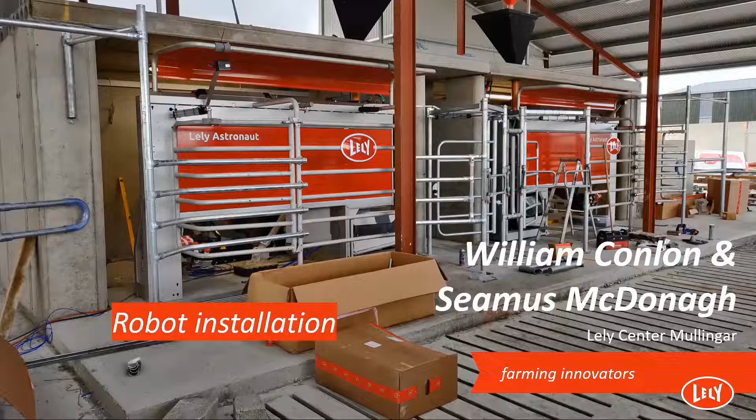Okay, thanks, Niall. So my name is William Conlon and I work on the yard design side of things. I'm just going to take you through briefly the design side of the build and what the project coordinator's role is when it comes to installing a Lely robot.

So my first visit on the farmyard design side of things, I'm really trying to get a feel for the farm, the farmer, how machinery moves around the yard, how cows currently move around the yard if you're an existing farmer, or how cows could potentially move around your yard if you're a new entrant into dairy. So you're looking at what sheds are on the yard, what sheds you could tie in and convert over and use for cubicles and to put the robot into, or alternatively, if there's no shed suitable, then where you would position a new greenfield build.

So what you're really trying to achieve is maximizing cow flow throughout the yard to get to and from the robots. You're depending on your cow to walk in from grass, be milked, go through the robot, go back out through the Grazeway gates and go back out to grass. And you're asking her to do this a couple of times a day.

So the last thing you want to do is put any sort of blockage in her way that's going to slow her down or stop her getting to that robot. So it's all about trying to maximize cow flow and just give cows the options of going into the robot at ease.

Like I said, we're looking at the area that's for development, whether it is existing sheds. I suppose a lot of the jobs, maybe 80% or more of the jobs we're involved with, you're trying to fit a robotic milking machine into an existing shed without compromising on the space around the robot, on separation areas, or any of the other aspects involved with robotic milking. So it is a balance to try and get everything into existing sheds.

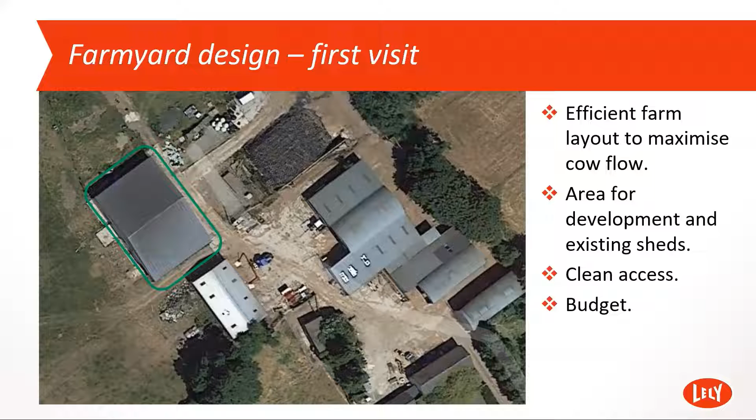A year later, the farmer installed the second robot and pushed on the numbers. To start off, 2 banks of head-to-head cubicles were run down through the shed. To one side of the shed then we had our Grazeway.

So this is, I suppose, what we'd call the dirtier side of the yard. This is the side where cows are going to be coming in and out the whole time. So there's going to be a lot of cow traffic, a lot of movement over this area. So this is what we call our dirty side.

So then we look at the other side of the yard, what we call the clean side. This is the side where your milk lorry is going to be coming in, where our service engineers are going to be coming into your robots, where you're going to be driving in and out with machinery, either with silage, where your meal lorry is going to be coming in. So this is the side there's going to be a lot of traffic.

So we want to keep cows away from this, because I suppose it's different to if you were milking traditionally through a parlour. You can bring your cows in, lock them in, milk them, and work around the yard and then put them all out. Whereas with the robotic system, there's cows coming in and out entirely.

So here we see our milk, where our milk tank is located. Our lorry comes in, picks up our milk, swings around and goes back out. We also have our milk coming across the yard underground in a duct over to our tank.

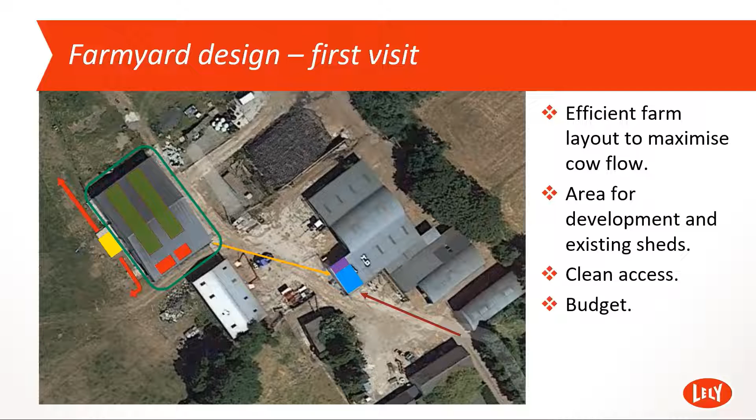So then outside of my role as kind of the farmyard design, we also look at what the lads do as kind of the project coordinators and what the benefit of them is to the project. So I bring the project up to a stage where we've agreed the design. We're fully agreed in the design.

That could take 3 or 4 visits depending on the farmer and what they want to do. You might present a couple of different options to the farmer and see what they come back with. So when the full design is fully agreed upon, we hand over to a project coordinator.

The big benefit of having the 2 project coordinators is that they've installed 350 robots plus between them. So there's a great wealth of knowledge and experience of what's involved with an installation, how to liaise and how to work with builders to make sure everything is being done correctly, so that when we come to install the robot, there are no hiccups or delays.

So like I said, it leads to a reduced installation time when it comes to actually fitting the robot itself, because everything is done right. The robot can be put in, bolted down, and away you go.

They give good guidance to keep the building costs of the project down. Just because they have that much experience of the building work and what's involved, they can guide farmers as to what they should do and what they shouldn't do, and help keep a lid on costs.

They produce detailed builder specification drawings that the builder is able to work off, so again, there's no confusion about where ducts need to be or what needs to be done.

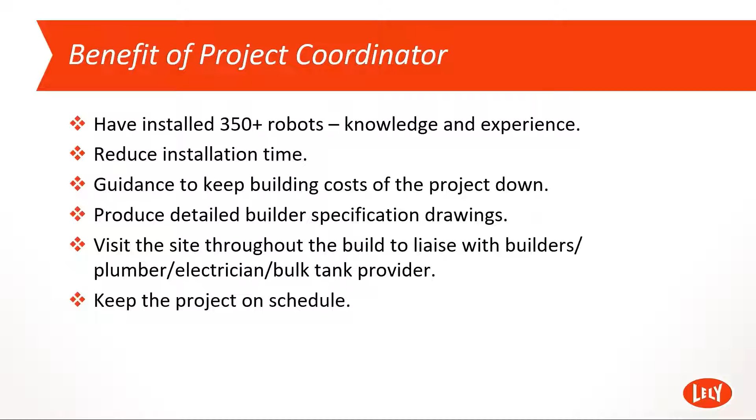Along with this, they'll visit the site throughout the build and liaise with the builders, the plumbers, the electricians, the bulk tank provider, just to make sure every aspect of the project is moving along at the same stage. Because often when there's building work going on farms, it can be difficult for farmers to focus on all the areas and keep everything moving at the same time.

So their job is really to keep the project on schedule and stick to the agreed upon installation date, whenever that may be set out, maybe 4 or 5, 6 months before the robot's installed. So then they deliver the project right up to the robot startup.

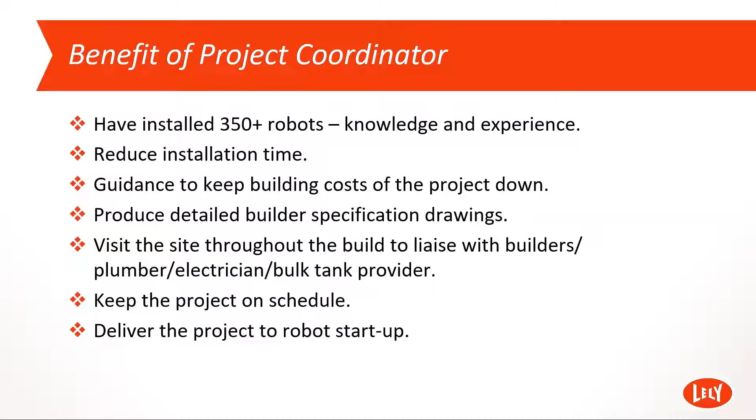That's where their job ends, and I suppose we hand over then really to the farm management support advisors who work with the farmers from when you start milking moving forward to get the best out of your robot. If we're looking at installation times, I suppose we have a big benefit compared maybe to traditional milking systems, parlours, rotaries, whatever system it'd be.

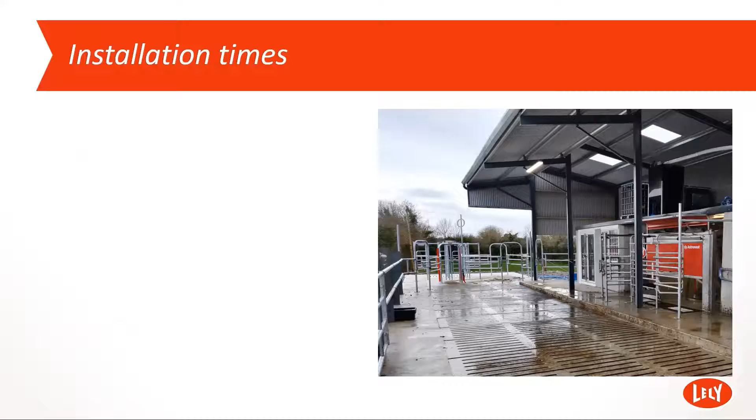In that we could typically install a single robot and Grazeway in 3 days. We'd run all the services, the milk line, the air line, the communication, the chemical line, and the water lines are all run when the first robot is put in. So it means that if we come back to add on a second robot, or third robot, or fourth robot, you're just teeing off these lines that are already run, so it's a lot quicker of a process.

We could do installation jobs for 280, 300 cows in maybe a week and a half, which is a big difference to what some of the larger jobs on traditional systems could be.

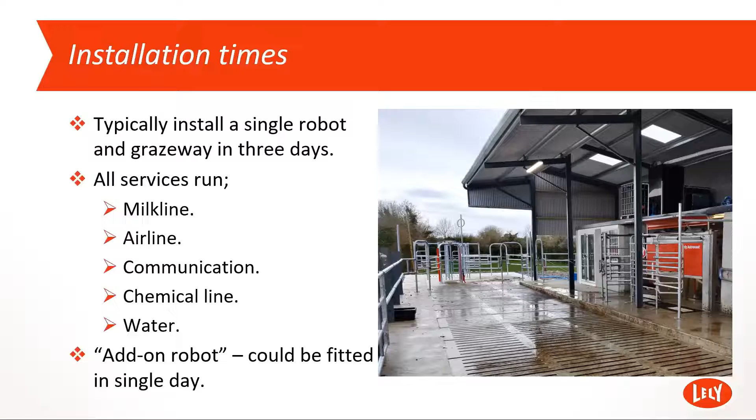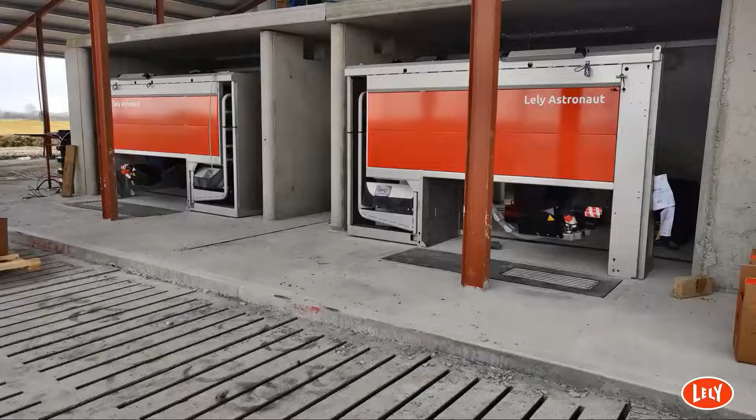So then this is when the robots can be simply lifted into place. And the work here then develops from this onto this image, which is the robot with the bar work completed around it. So that's what we do, that's what our engineers do, and you leave robots like that ready for startup. So there's no additional bar work that needs to be done in that area.

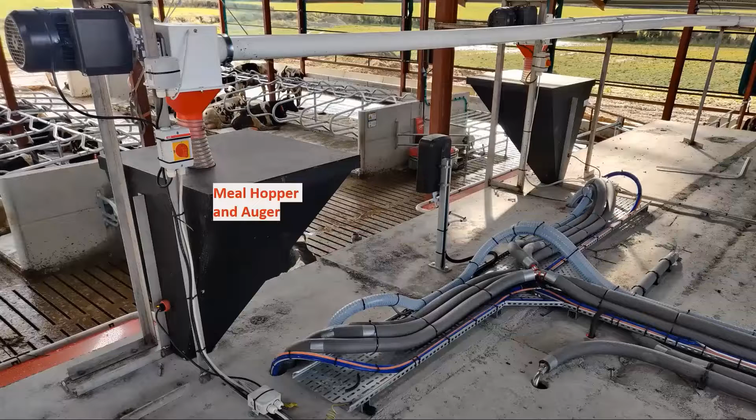Again, we're just going to look briefly at what's above the robot. Very simple. You have the meal hopper and the auger. You have your milk line dropping down into the two robot rooms. You have your vacuum line, again, running to the two robots, and your airline communication and chemical lines. You also have your water. So this is all what we do.

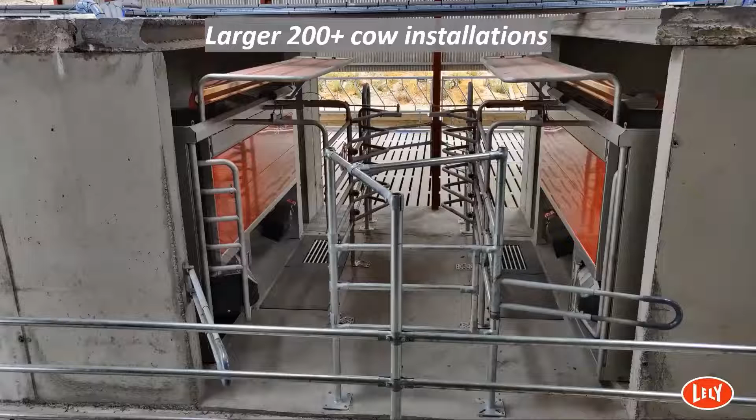This is what the team at Lely Mullingar provide when we do an installation. Now the meal hopper and the auger, that's up to the farmer to sort out, but all the other lines is what we do. So I suppose we've looked at the last job there, a two robot head-to-head system.

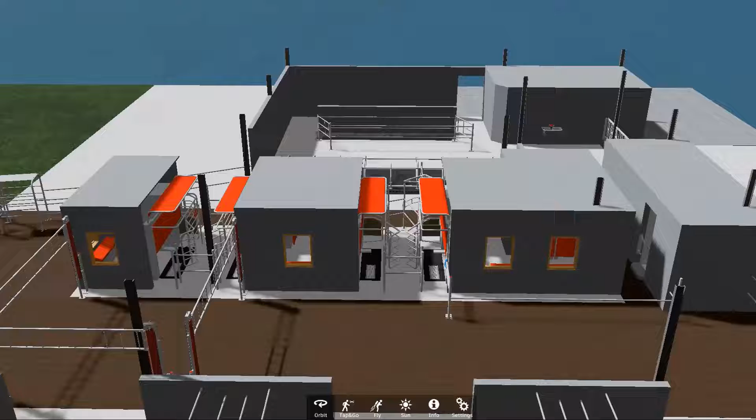For larger jobs, maybe 200 cows plus, we can see farmers going with a checkout system. This is where the robots are put up in a line beside each other. There's positives and negatives to each system, which you can maybe see on earlier webinars. We see here that the cows enter from one side of the robot, the near side, and exit out onto a different area, the far side. So it just keeps the pre-milking and post-milking cows separate, and can be a real benefit for cow flow when you have those 200 to 300, 400 cow herds going through robots.

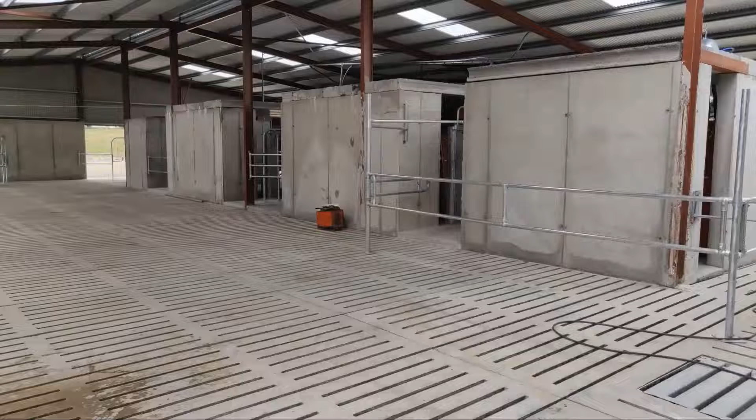You can see as well that the four robots in this picture still take up a relatively small footprint. A few spans of a shed, and this is a shed that can milk 280 cows through four robots. On the right hand side we have our two central units, these act as the brains of the robot. This is where the chemical is pulled from, and where the water is heated for the robots as well.

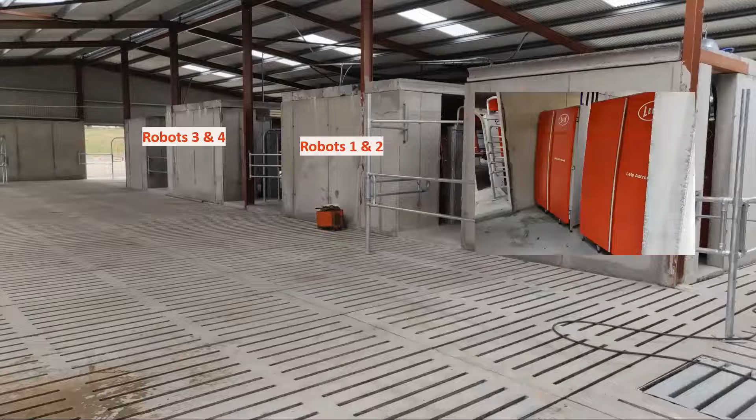The next room then, we have robot 1 and 2 inside that room, and robot 3 and potential robot 4 in the far rooms. Again, this is your two central units, two cabinets. We have an area behind these where you can drop in big barrels of chemical, trying to keep the labor side of things down. It's all trying to feed in to make the system run as simply and efficiently as possible for both the farmer and the cows.

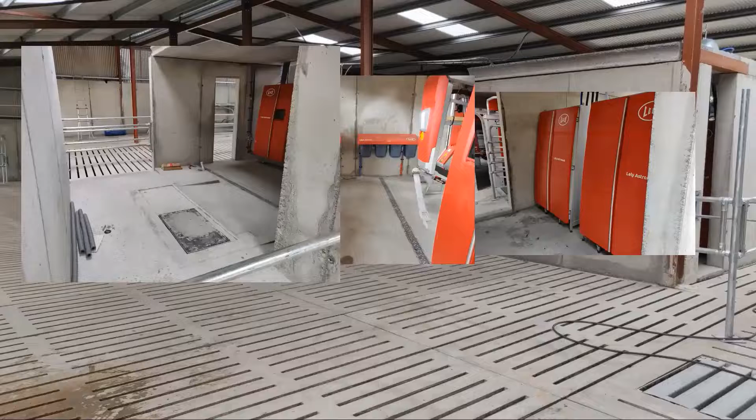This is the inside of the first and second robots. We have our milk-for-use buckets on the back wall, where you can send either colostrum milk or waste milk. We have the inside of our third robot on the right hand side in that picture, and we have the base already in place for a potential fourth robot down the line. You're looking at an installation of that fourth robot of maybe a day and a half, so it can be a very, very quick and efficient system.

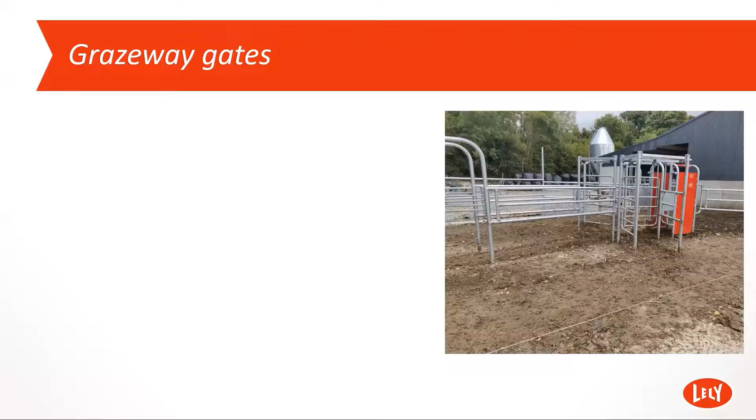Outside the robot, I suppose the other key area is the Grazeway gates. These are the drafting gates that work in conjunction with the robot. We'd work a lot with the farm management support advisors as to where this should be located on the farm and the layout of it. They generally walk the farm and map the grazing block itself and decide where the roadways are going to be and how cows are coming back into the yard and exiting the yard.

They work from the Grazeway out towards the land, and we generally work from the Grazeway back in towards the yard. So there's a lot of work over and back between the two teams to make sure cow flow isn't compromised when you're deciding the location of the Grazeway gates.

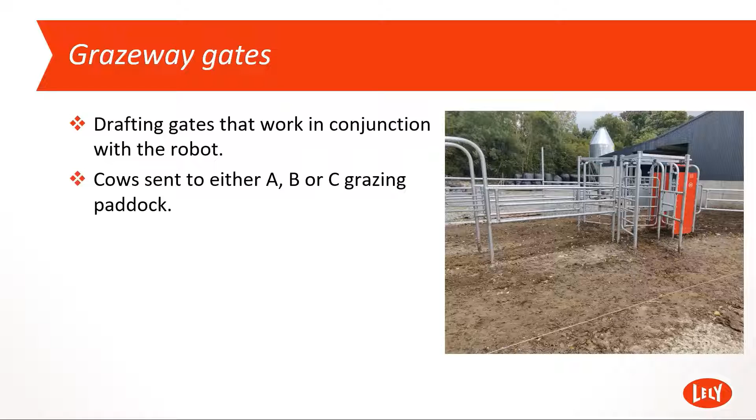Cows can be sent to the A, B, or C grazing paddocks from the Grazeway gates. To get out of the yard they have to go through this Grazeway gate, the red gate you can see there in the picture. If the cow is due to be milked, she won't be let out through this gate, she'll be kept in the yard. But for cows to get back into the yard, they don't have to go through these gates - every cow has free access to go back in through the one-way Texas gates to get back into the yard to be milked.

You also have the option to send cows to a local paddock from either the Grazeway or from the robot. This can be a small, maybe half an acre paddock close to the yard, where you could send cows that are in heat, or a sick cow if you want to have a look at her and don't want her standing on concrete. You'd see the real benefit maybe in May time - if your bulling cows are automatically drafted off because of the automatic heat detection system, they can just be waiting in this paddock for when the AI man comes, brings them into the shed and AIs them. They can get from this area back into the robot to be milked, but they'll only be let back out here again.

Generally, your Grazeway gates are located on either a concrete slab or a slatted tank or maybe a flow channel. Lately, in the last couple of years, we've seen a lot more farmers putting in a slatted tank anyway because they're under pressure for slurry storage, and they're running it out a bit further than the shed and having the Grazeway gates on it. But there's still probably half of the Grazeway gates on farms sitting on a concrete slab.

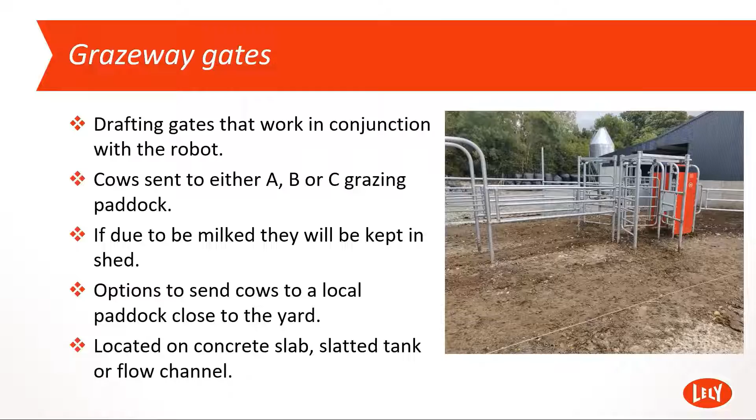Here we have a relatively recent installation of a Grazeway on a slatted area. You can see the bit of a track there where cows are coming in and going out through the gate the whole time, so it can be an area that gets dirty. The tank underneath just makes it an easier area to keep clean. Again, another Grazeway just sitting on top of a tank.

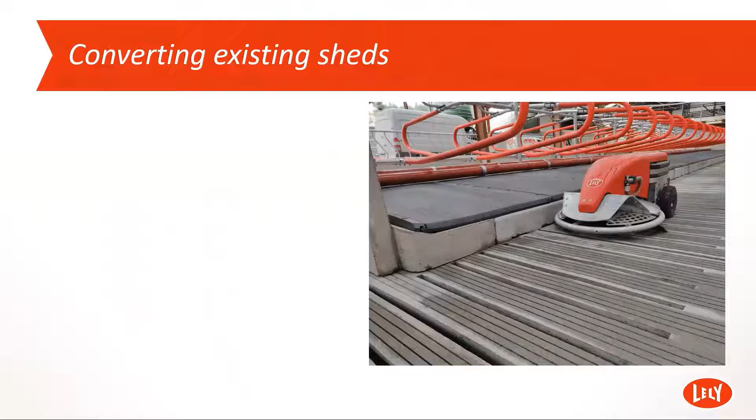For suckler or beef men that are swapping over, a lot of farmers use existing sheds to convert over to cubicles and put the robot into. So, by and large, we want our robot sitting just off a slatted tank, as it is a high traffic area.

This is easy to incorporate if we have a new build. But where there can be difficulty is if you have an existing build and the slatted tanks really aren't suiting the location where you want to put the robots, but you still have a good lot of slatted tanks that you don't want to go building more slurry storage that you don't need.

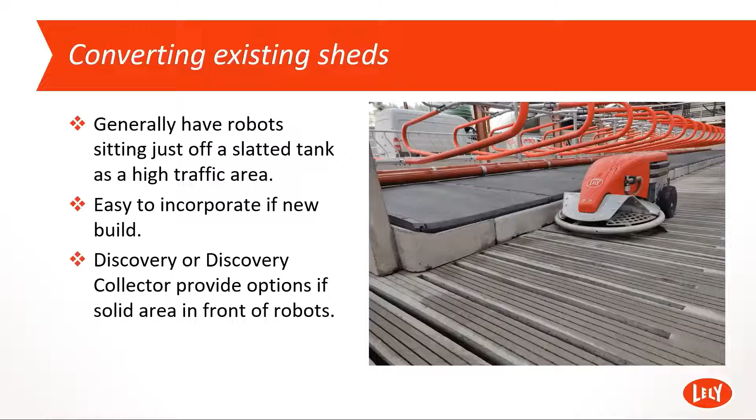So you have the option of maybe going with the likes of a robotic scraper. They can either be the standard Discovery, shown in the picture here, that'll just push slurry in front of it, pushing over a solid area into a slatted tank, or you can go with the Discovery Collector. This will suck up slurry when it's on a solid area, and when it gets to a slatted tank, it'll dump the slurry. Again, it can provide a lot of options to farmers and maybe be more cost effective than having to build a slatted tank.

Here we have a 2-robot installation with solid area in front of it and a lot of slatted tanks. He's using a Discovery Collector to keep that area clean with 120 cows being milked, so it's doing a good job.

Here we have another single robot farm, again not far from a slatted tank, but solid area in front of the robots. He went with a standard Discovery to push the slurry into the slatted tank a good few times a day to keep things clean.

Just going to talk briefly on the TAMS grants that are available, because the deadline is the 21st of August to apply for this tranche. There is another tranche opening up on the 22nd of August, but the amount of people applying for the TAMS grants is increasing. So if you're thinking of doing something, it's well worth putting in an application or giving us a call, and we'll talk through with you a bit more of what's involved.

A general applicant can get 32,000 in grant aid, and a young farmer can get about 48,000 in grant aid. And if farmers go into partnership together, they could get between 64 and 96,000 in grant aid. So it's a lot of money, and it's still well worth looking into if you're thinking of going down that route. One of the benefits of a robot is that there's no planning permission needed if you're applying for a grant on a robot.

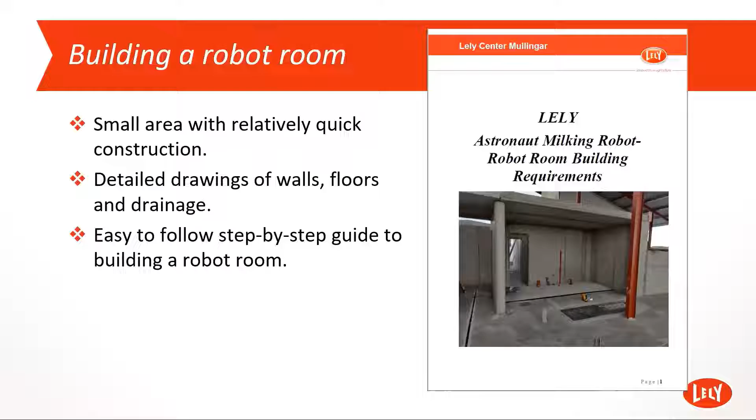What's involved in it is walls, floors and drainage. We produce a step-by-step guide to building a robot room, and we also produce drawings, probably about 5 or 6 different ones. The first drawing shows the wall layout. The second shows a cross section through walls with drainage underneath the robot. The third would show cow flow, so the builder can understand where cows are coming from, where they're milking in the robot, and where they're going to, giving him a better understanding of what we're trying to achieve. The fourth shows typically the foundations underneath the robot and the support. The fifth and sixth, again, are for the robot footing and for drainage.

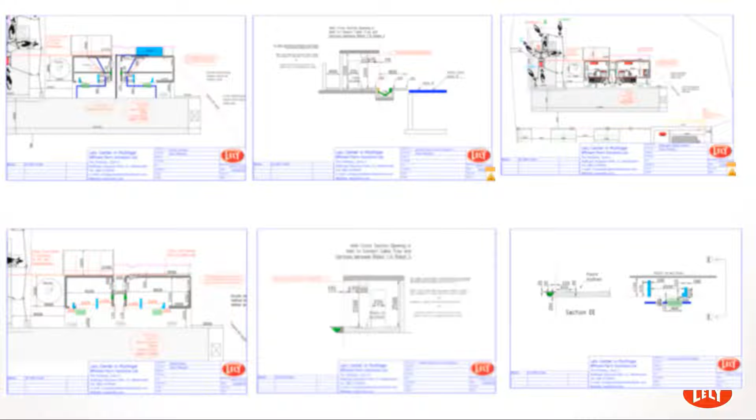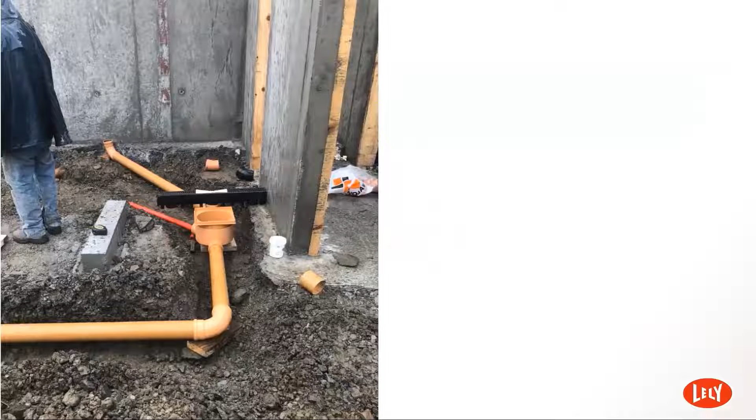The next slide shows some of the drainage underneath the concrete floor. You can see an unlidded access junction, or unlidded AJ, and this is how we get the milk across the floor. You can see it goes under the drain and over to the back wall. This is poured inside in the floor screed.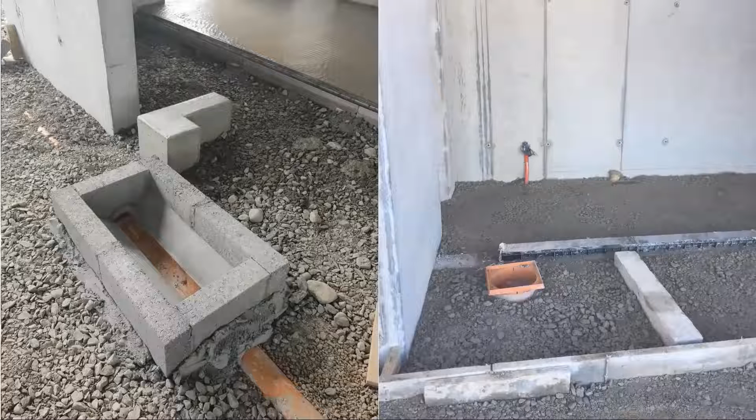The second slide just gives you it from a different angle. Here, underneath the grate, is the manhole I was talking about, where the cow will dung into, and then it's taken away in the 4-inch pipe. The other two concrete pads — one is an L shape, and the other is a slender pad, about 3 foot long and maybe 6 inches wide. This is where the robot is bolted to, and this is where the robot takes the weight.

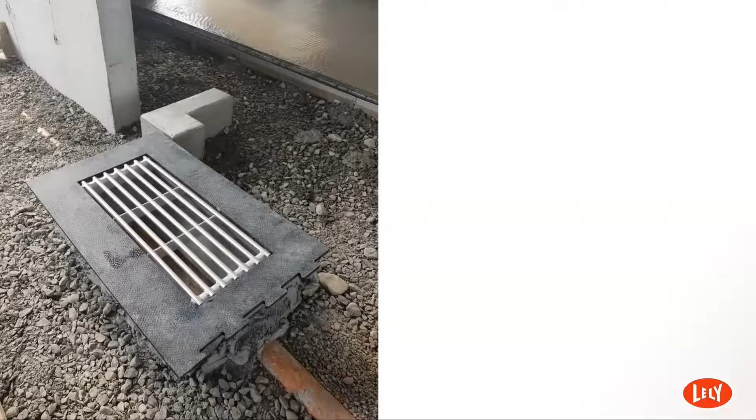Here again we can see the rubber mat and the grate, as I was explaining earlier. With a wider angle, we can see the rubber mat and the footprint that the robot is bolted to, just before our final concrete finish goes on.

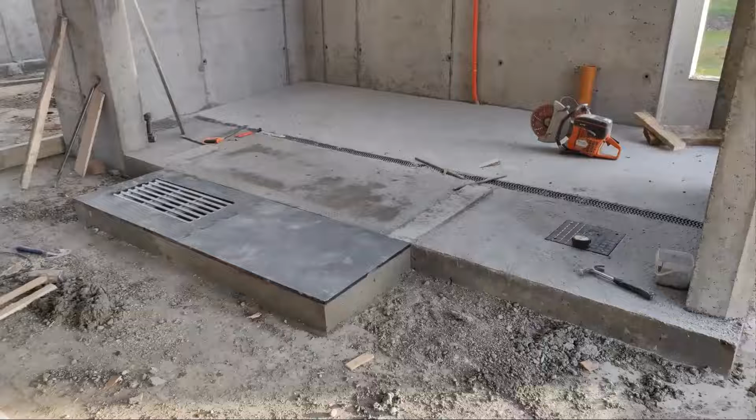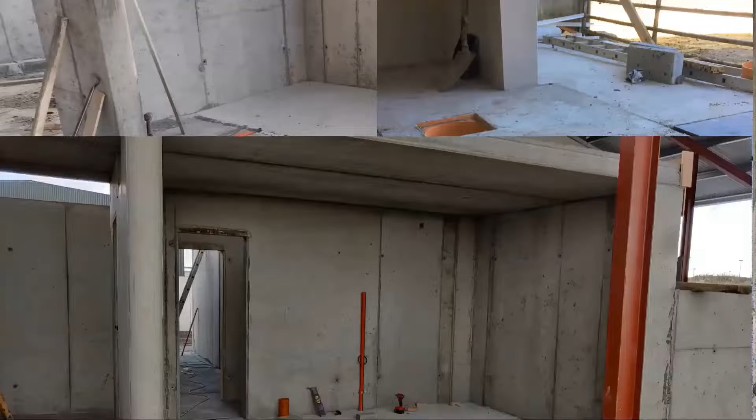Developed on, you can see the mat and the final floor put in place. That black drain I was talking about is the surface drain of the floor. You can see the floor is falling, falling to a V toward this drain. This is what keeps the whole area clean, with water disappearing down that drain and away from the area. Again, just to remind you, that's the finished room.

So what else is needed for the building area, or what do we need to produce? We need a dry, clean, dust-free room for our compressor — this is the compressor. Then we have our milk filter, so the milk passes through the milk filter, and from here it heads off to the dairy.

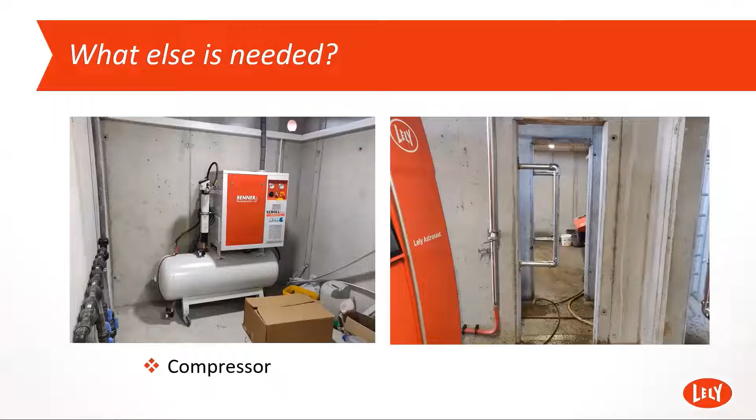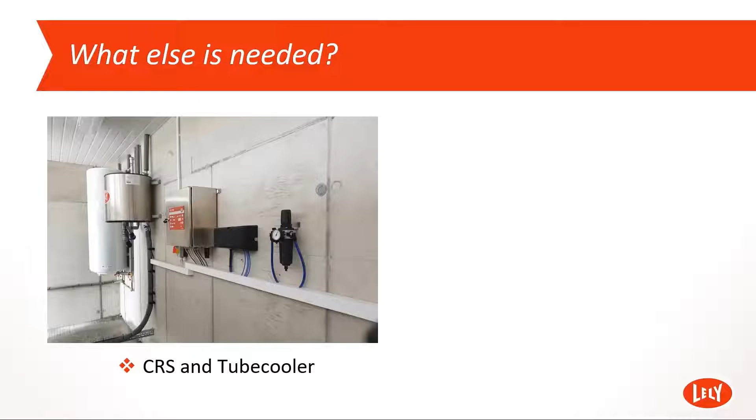When it gets to the dairy, in this photograph we can see our tube cooler, that cylinder on the wall. To the right of the tube cooler is our CRS, which is the communication between the milk tank and the robot. Also, we need an office, where we keep our computer, and there are software licenses associated with the T4C, which is the farm management software.

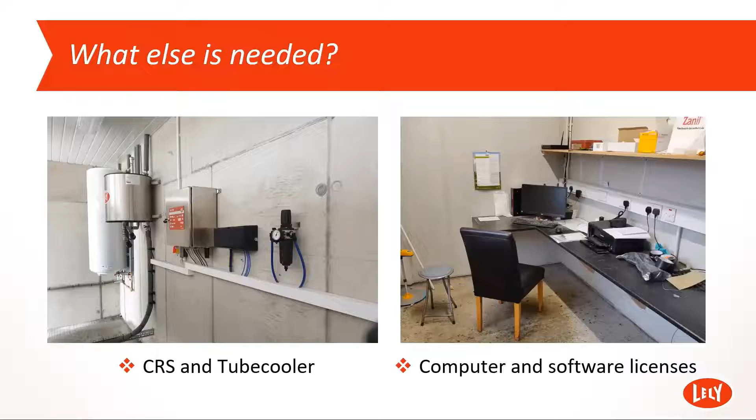Next, we talk about the minimum electrical requirements. You can either have single phase or 3-phase. The requirement for our 2 robots is 7 kilowatt. The compressors are 4 kilowatt. Typically a bulk tank would be 3.5 kilowatt and a dairy heater would be 3.5 kilowatt as well.

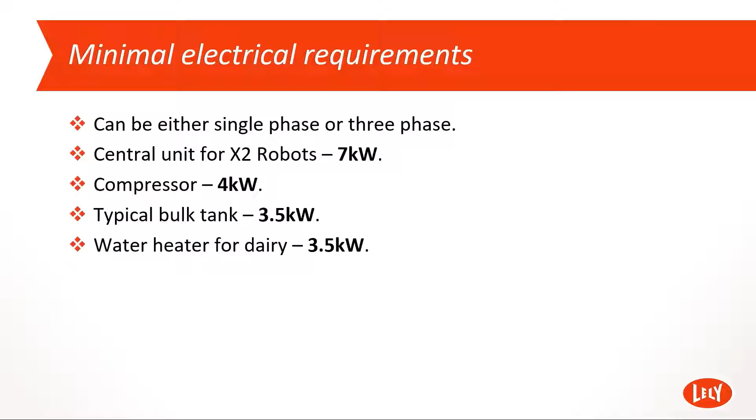So generally farms would be looking to work off about 20 kVA, and this would be single phase supply. Typical power on farm of robot installations would be 20 kVA. Now, some farms are working off 16 kVA, which is fine. More would be greater, 24, 27, 29. It all depends on what other demands are on the farm.

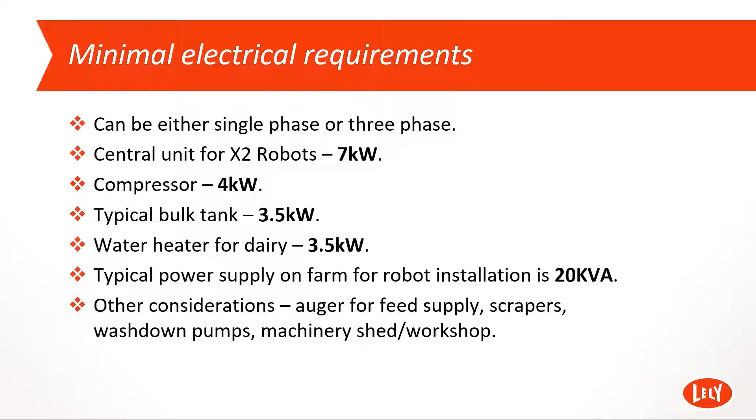So you could have a well, you will have an auger system for the supply, you could have scrapers, washdown pumps, or you could have welding going on in a workshop. So this is decided by consideration with your electrician.

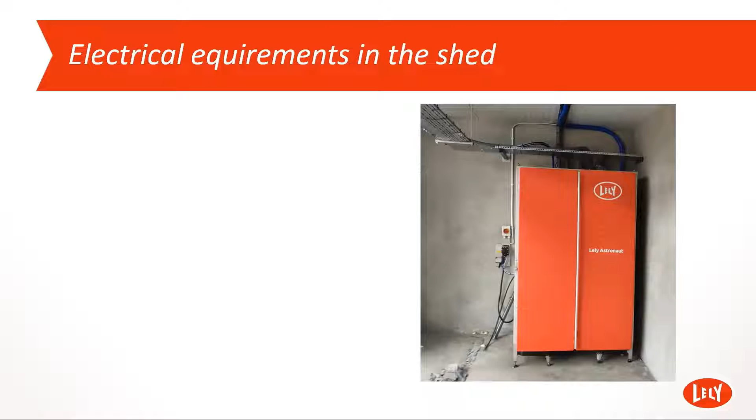So here again, in the photograph, we can see our central unit. This is the central unit that William mentioned earlier on. This incorporates the vacuum pump, water heater, and our chemical pumps. So for Lely and for our installation, we require 3 power supplies, so 3 rotary isolators: one at the central unit, the second one at the compressor, and the third at the CRS.

Inside the robot rooms, we need a blue 16 amp socket. This is for our service engineers in the future. And with only 3 isolators, you can see that there's a minimum electrical cost required.

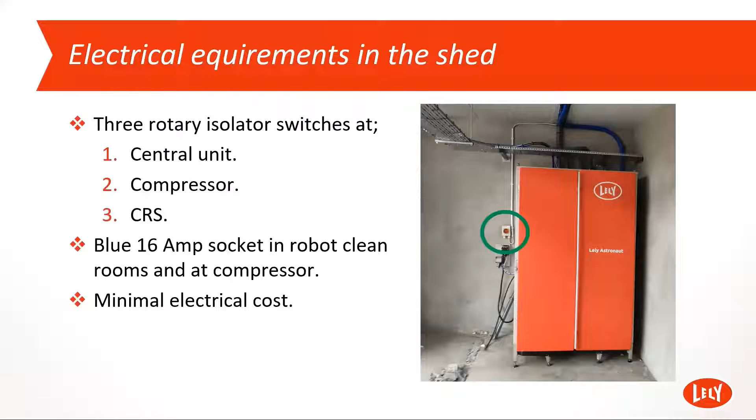So water requirements on a robot. For a single robot, 2 robot, you're looking at approximately 400 to 500 litres a day. So we would have a 1,000 litre storage tank. The reason for the storage tank is that it gives a break in the water supply.

The reason why you need a break in the water supply is because you have chemicals connected and you do not want that to siphon back into your drinking supply. Also, if your water supply was switched off, or in instances where you have a well, if the well pump broke, you have a reserve.

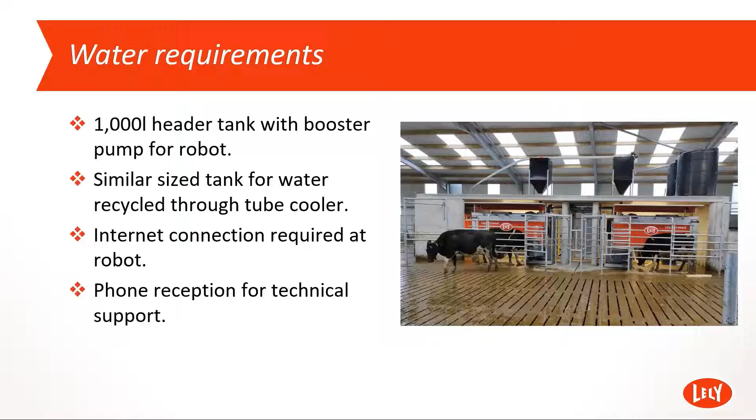Internet connection is also required for the robot, as is phone reception for technical support. Thank you very much, and we'll lead on to any questions now.